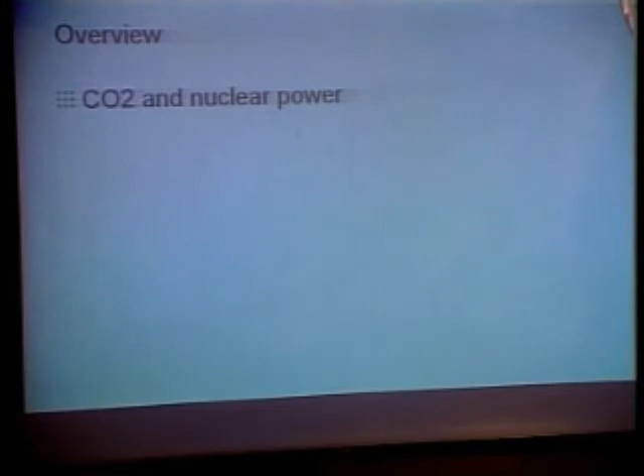Okay, so first of all, I'm going to look very briefly at some of the UK's carbon dioxide emissions and the role that nuclear power potentially has in reducing those emissions as a result of the need to reduce emissions because of climate change. That's the key argument the nuclear industry puts forward to support building new stations in this country.

Then I'm going to look in slightly more detail at what our electricity system looks like at the moment, not just generating stations, but also the broader infrastructure.

And then you'll notice I'm talking about future energy options, not just future electricity options. What I'd like to see is a situation where we begin to think about how we use energy across the board - transport, heat provision, and electricity - and not separate them artificially, as we do at the moment.

And then, to sum up, I want to think about some of the implications of building new nuclear power stations and what impacts that might have on one possible future configuration of the energy system in the UK.

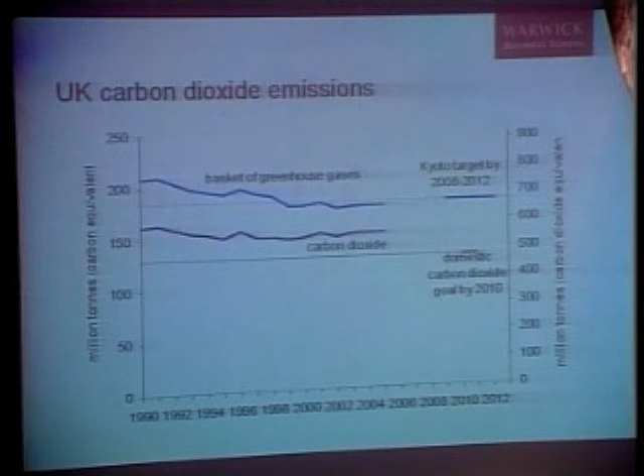Okay, so this is looking at the UK's carbon dioxide emissions. As you can see, the top line, the blue line, is our greenhouse gas emissions since 1990. Under Kyoto, we've got a target of reducing those emissions by 12.5% against our 1990 levels by 2008 to 2012. It's not hugely clear, but the light blue line is in fact below the dotted light blue line, which is the Kyoto target level.

So in other words, we're pretty much going to meet our obligations under Kyoto to reduce our carbon dioxide emissions. If you look at the lower line, that's our carbon dioxide emissions. The government set itself, when it came into power, an additional challenging target of reducing carbon dioxide emissions by 20% against its 1990 levels by 2010. And when it came into power, it was pretty much on target for doing that.

You can see there was a blip in 1996 when carbon dioxide emissions rose, but effectively they'd been on a relatively steep downward incline since 1990. However, over the last couple of years, they've actually started to go up. They leveled off and then started to go up. There's certainly no further decline in the emissions of carbon dioxide.

And what that means is that the government set itself a target in 1997. It claims it's taking climate change very seriously, that it wants to do everything it can to head off the threats of climate change. But actually, when it comes to the UK's own performance, it's performing pretty badly - the government has done almost nothing since 1997 to reduce our carbon dioxide emissions lower from their 1990 levels.

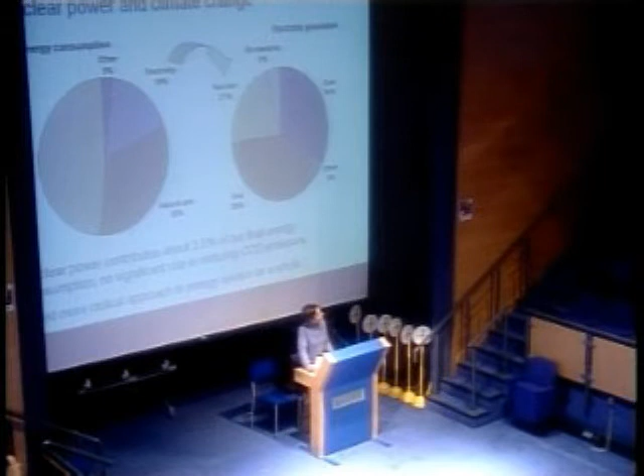But if you're talking about reducing carbon dioxide emissions on the scale that is needed and the government is committed to doing, what you need to do is think about the energy system as a whole, not just electricity. Electricity is 18%. You need to think about all of this, because that's where the majority of carbon dioxide emission reductions are going to come from.

So when I talk about energy systems and electricity systems, I just thought it would be helpful if I explained a bit more about what I was talking about.

That's a term that gets bandied about, so I thought it'd be useful if I explained what centralized means. It means there are very few, very large generating stations dotted about on the system. They tend to be very large coal or very large nuclear power stations, all sited pretty much away from the areas where the power is actually used.

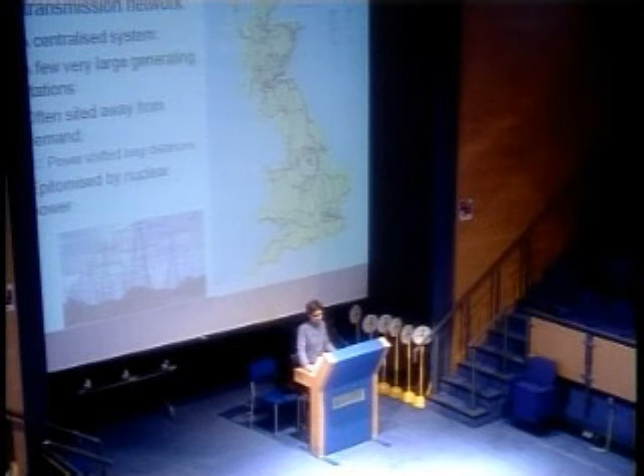At a lower level, what you get is the distribution network. So you have those very large pylon-type things shifting bulk power to and fro across the country, and then once you get down to where people actually use power, that's called the distribution network - those are the poles rather than the pylons, if you want to think about it that way.

One of the key characteristics in a centralized electricity system of the distribution networks is that there are no power stations really sited on these distribution networks. You've got all the lines and people connected to them because they want their power, but there are no power stations connected because they're all connected to the transmission network.

What distribution networks are designed to do is take the power from the transmission network and ship it one way down the wires to where it's used - in other words, to your house, or to the factory, or to your office. Power just flows in that direction. They're operated passively; they're designed specifically only to operate in that one-way system. They're not designed to ping power backwards and forwards and act as some sort of balancer - they're just designed to ship power that one way.

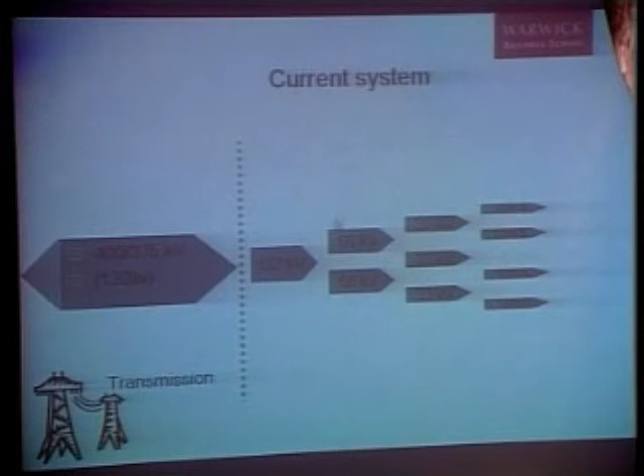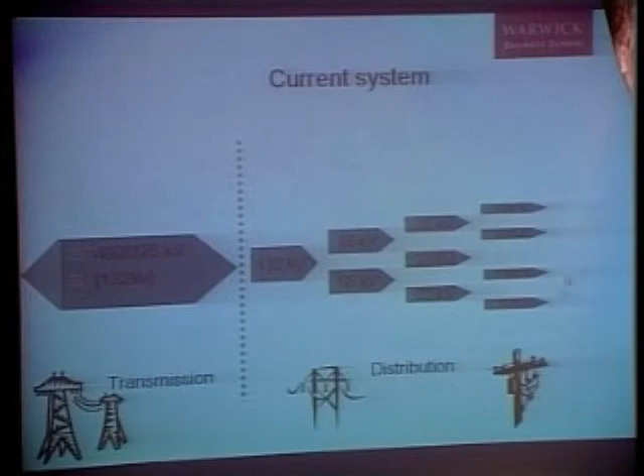Lower down the scale, as you can see, the lines get narrower. That's the distribution network, and that goes through decreasing voltages until you end up here, which is where the power is taken off, or most of the power is taken off.

At the moment, a lot of the power stations, whether fossil fuel or nuclear, basically inject their power straight into the transmission network. Large users, people who use large quantities of power, very big factories, can take their power at very high voltage straight off that transmission network.

Smaller factories take their power off the distribution network, as do office blocks, developments, large local authority projects, whatever. They get slightly lower voltage, but they're still taking it off the distribution network. Finally, right at the end of the chain, you've got houses, or very small offices, relatively small users.

In terms of how the power flows on this network, you've got two-way power flows on the transmission networks, and one-way power flows on the distribution networks. In other words, they just take power from the transmission network and ship it to the end user. That's it, that's all they do - they're just there to cart power about in one direction. That's a system we've had in the UK for 50 years.

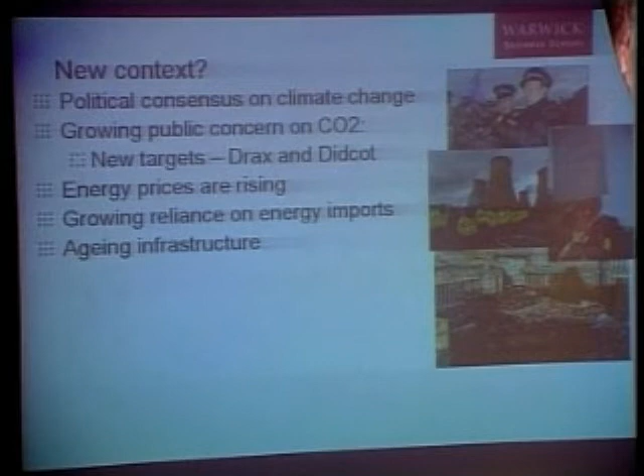Also, the infrastructure is getting pretty old. The pylons and distribution line poles were designed for a lifetime of 40 to 50 years, and most of them are now reaching the end of that lifetime. They're going to have to be renewed, and that's something that's going to cost billions of pounds, spent over the next 10 to 15 years. So we need to start spending money on our energy infrastructure. If we don't, the lights are going to start going out. But more importantly, spending that money to renew our infrastructure also gives us an opportunity to change it rather than just replace it.

Then there are broader security concerns about terrorism and the possibility of attack - not just on nuclear power stations, where there's been a high profile debate about security issues, but also on other stations and other parts of the infrastructure. There are scenarios people have put forward, for example, of people bombing transmission networks and effectively cascading power failures down the system, because it's so centralized and everything relies on the transmission networks to ship power around the country. That's a very real concern.

So what you've got there is a set of environmental and security drivers for the energy policy debate, which are effectively new and haven't really been high profile so far. But what it does mean is that there's a possibility at the moment to challenge the current model of the UK's electricity system, and to think again about how we configure it, what we use to generate our power, and what the system looks like.

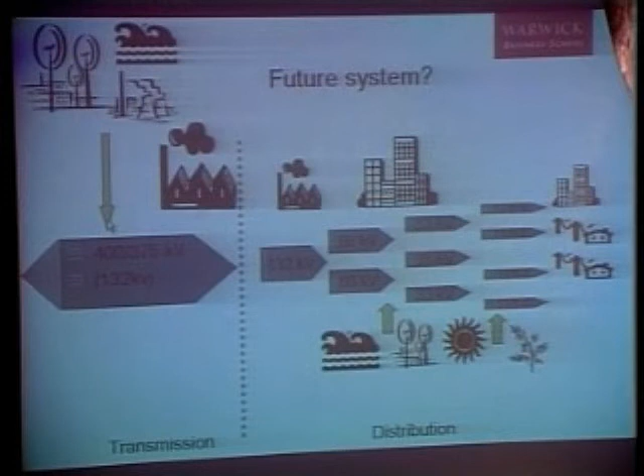Instead, you would have power based on the distribution lines, and that would be largely renewable power - wave, wind, solar power, either solar thermal or PV, and also biomass power. That would be injected into what have previously been passive distribution lines, making them an active participant in the electricity system. In addition, there are a whole pile of new technologies coming forward to store energy - basically batteries, not nuclear waste barrels, which I realize they looked like earlier.

Part of the problem with renewables, which renewable skeptics highlight, is that a lot of it generates intermittently - in other words, it's not constant. You don't get power out of your windmill if there's no wind blowing. But what you can do, and what's increasingly looking economically viable, is to store that power - effectively like recharging a battery. When there's an excess of wind, you store it in your battery; when the wind's not blowing or there's high demand, you pump that power back into the grid. That would be a way of counteracting this problem of intermittency with renewables.

In addition, you could have combined heat and power plants - plants that generate both electricity and heat, and the heat's used by small factories or large offices. They'd have a little power plant in their basement generating electricity, plus using the heat, or using the heat to power things like fridges, because that's a whole other dimension, using combined heat and power plants to actually produce air conditioning. Don't ask me how that works, it's beyond me. But in addition to taking power off the grid, they'd also be in a position to inject power into the grid.

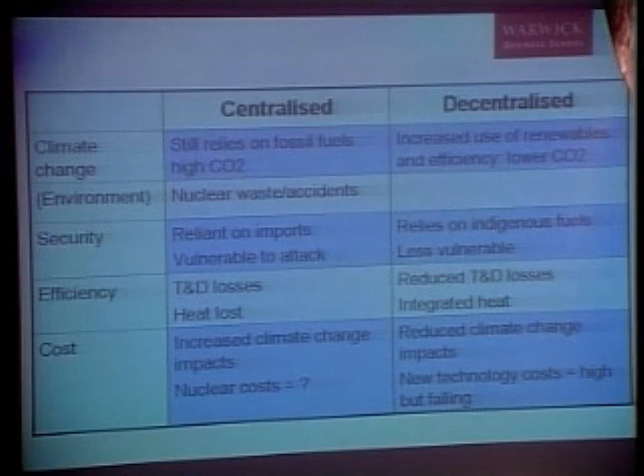They haven't shown the problems of ever increasing costs that the nuclear industry has. So I think if you're taking a bet, I would go for the smaller scale, more novel technologies at the moment than I would put my reliance in nuclear power being a cheap future generating option.

And then there's other issues which may or may not be interesting. One is that in a centralized model, all the power stations are sited way away from where you live. You don't see nuclear power stations. Unless you live next door to them, you don't know where your power comes from. In a decentralized model, you would know pretty much where your power came from. It may come from your own roof, who knows?

But that gives you, not just yourself, you become part of this system, and because you're part of it, you've got a greater degree of control over it, and that level of responsibility should in itself lead to greater awareness and lower carbon dioxide emissions on an individual level.

Okay, so when I started off, I said that the government's thinking about building new nuclear power stations, and I wanted to think about what some of the implications of that decision would be in terms of the future configuration of the energy system, not just the electricity system. And I think one of the things, my starting point, in a sense, is that the two things are effectively incompatible.

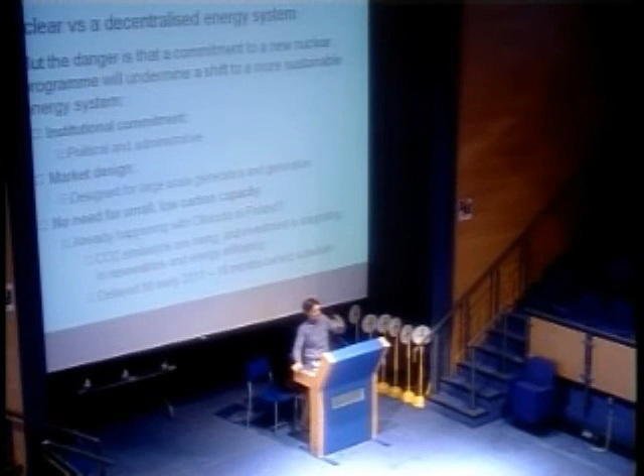So what they're basically saying is, we don't have to do anything to reduce our emissions till 2008, because that's when the power station will come online and our emissions will drop automatically, so we don't have to worry about it. In the interim, their emissions are going up. And because there's a great big lump of power coming online, people aren't putting money into renewables and energy efficiency because they're scared there won't be any need for the power, they won't be able to sell it.

And the other issue with Olkiluoto, which is inherent in any nuclear project, is that it's already delayed. They've been building this station for about 18 months, and it's already 18 months behind schedule - in other words, they might as well not have bothered starting. They've got huge technical problems with this, but they're also pouring in huge amounts of resources, and people are getting very complacent in the interim about their carbon dioxide emissions.

So does all this matter? What I'm basically saying is, if you're going to build new nuclear power stations, you're not really going to be able to have a decentralized energy system. It's just not going to be worth it. You're not going to have lots of renewables. You've got to make a decision between one and the other.

In policy terms, regardless of my own personal view, there is a key issue politicians need to think about in terms of carbon dioxide, and what the nightmare scenario is: they decide to commit to a nuclear power program, they say we're going to build 5 stations or whatever. In the interim, as is happening in Finland, you stall investment in renewables, in CHP, and nobody bothers trying to reduce their demand because they think, well, we're going to get loads of carbon-free electricity in the future.

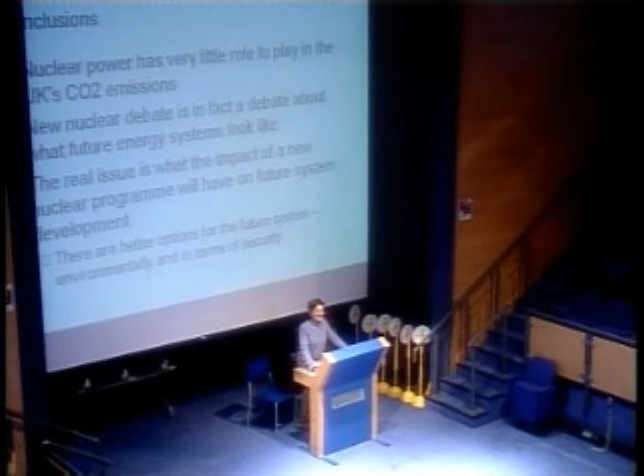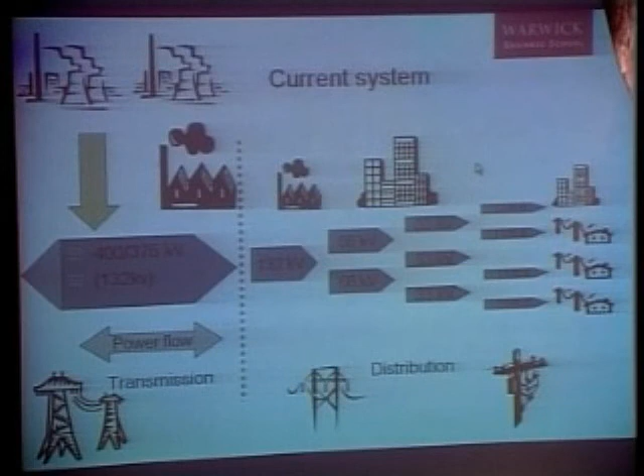Could you bring up the original pie chart? So we've got the pie chart, yeah. I'm not arguing for this particularly, but you were saying that you can only do that sort of 18% because that's the electricity that's generated, but can potentially houses be heated using electricity, and potentially electric cars as well, which means it could have a much bigger chunk of the amount of power. No, that's true. That's true.

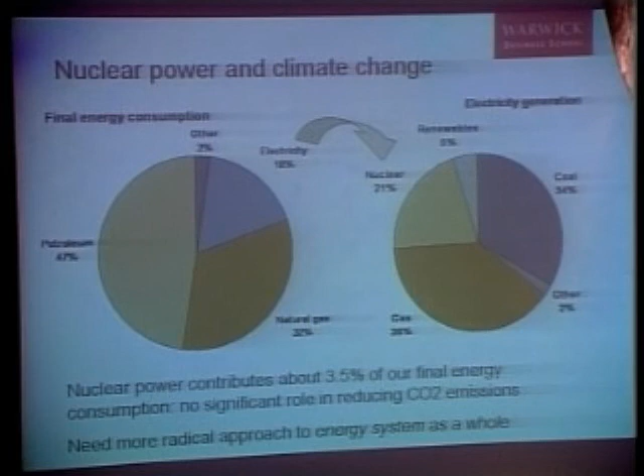I think in order to get a lot of that—if you're talking about expanding the electricity sector to have an electricity sector that's much more based on nuclear—then you're looking at a huge program of nuclear reactors in order to be able to address electric heating and electric cars. So you're looking at something like the French program, where they've got 75% nuclear electricity generation, and quite a lot of that is directed towards house heating and things. I don't think anybody's particularly talking about having a nuclear program on that sort of scale. I think the UK pretty much would rule that out.

The other thing is, I think you'd find it quite difficult to operate an electricity system in this country based on a very high proportion of nuclear power. One thing I didn't talk about: nuclear power stations can only operate at full output, if you like—they're all or nothing, either full output or shut down. Whereas if you think about how demand works during the day, first thing in the morning there's very high demand, at 5 a.m. there's no demand at all. So demand goes up and down like that, and if you've got a lot of nuclear power, it can't cope with the fact that demand's going up and down and spiking like that.

The reason the French can do it is because at night, firstly, they've got very high degrees of electricity heating, but also they export their power very cheaply at night to the rest of Europe. Whereas the UK, because it's an island, isn't hugely interconnected with the rest of Europe in terms of the electricity system, so it would really suffer. It would find it very difficult to cope with that sort of high level of nuclear output plus demand going up and down. So technically speaking, they'd find operating a system with that level of nuclear output very difficult.

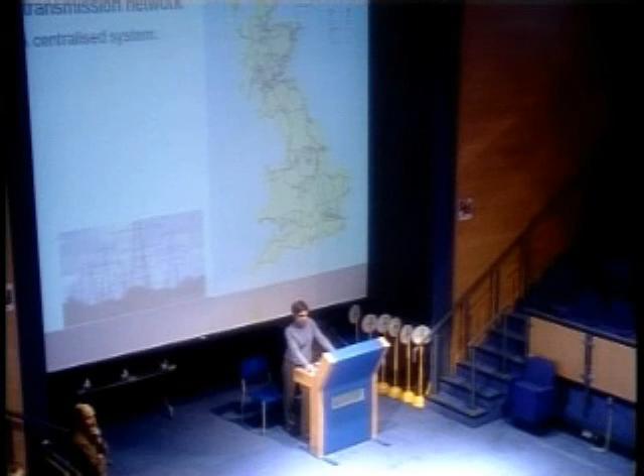That just leads you to a maximum percentage level of nuclear generation on the system. But the question I really wanted to get to - in your model, I do agree the trends are going in that direction, but we still have to first go for energy efficiency and energy savings as much as we possibly can, that's always at the top of my list. But then we've got to balance, apart from things like pumped storage and big battery devices, generation with demand. And if we don't get a significant net reduction in gross demand, the generation will be met from somewhere.

What is your view of the percentage you could probably meet by renewables, even in a distributed system, while maintaining security? I think that's an interesting question. I think you could, in theory, have a system entirely based on renewables, but it depends on the mixture you have. You could have some wind and some wave, but as you've said, they're intermittent and subject to weather patterns. Tidal isn't - it's intermittent but very predictable, so you can compensate. The more different technologies you've got, the less impact the intermittency has. If you have a high degree of biomass, potential for demand reduction - not just energy efficiency but people voluntarily going offline - and a high degree of storage, then you could, in theory, have a system that's entirely based on renewables.

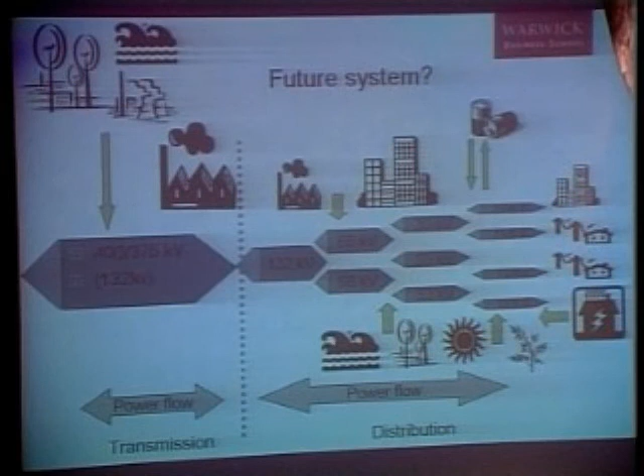That's a huge mistake we made over the last 20 years. So over the last 15 years, we built a lot of new gas stations in this country which only generate electricity. All the heat is lost. Actually, we should have built them to produce heat as well, and we wouldn't be nearly so worried now about what our carbon dioxide emissions are.

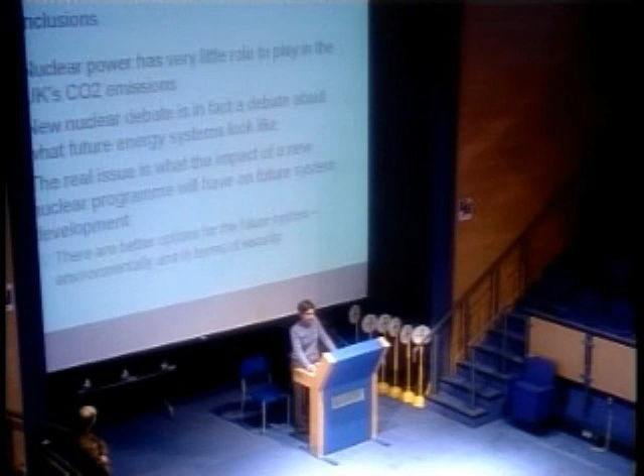You mentioned Finland making a bit of a mess of it. Is there a country that you would point to that's doing the opposite? Well, I'm glad you asked me that, as I didn't know how long this talk was going to take, and I didn't know quite how detailed the audience wanted me to go into it.

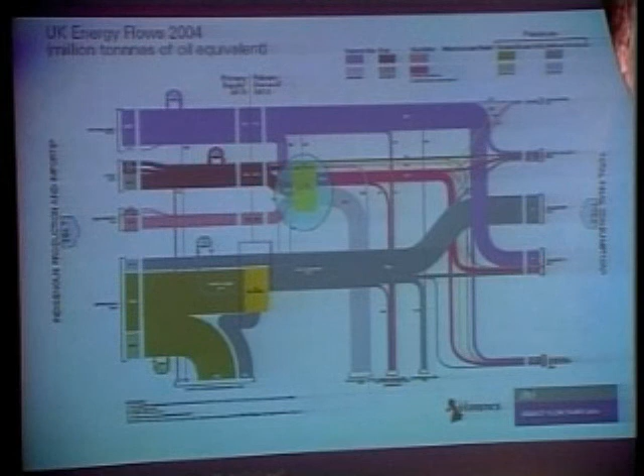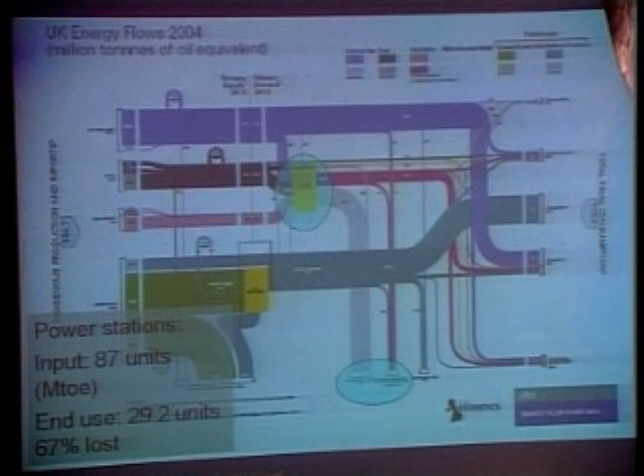So those are power stations, those are your losses. You input into this system 87 units, million tons of oil equivalent in this case. Power stations to final end use is 29 units. In other words, 67% of our power, one way or the other, is lost - 67% of our energy through this sort of power station system that we have at the moment.

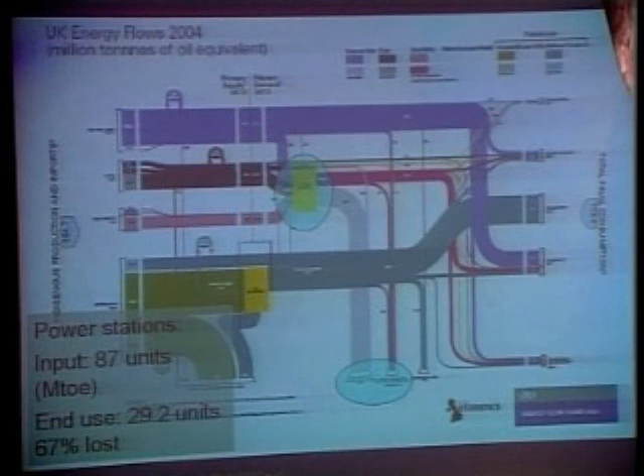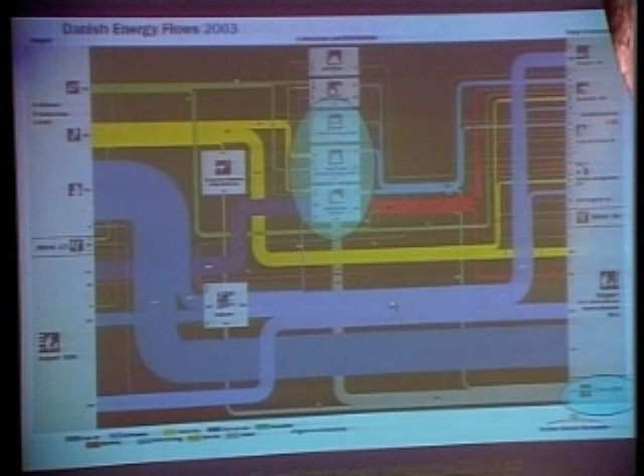This brings me to your question, which is - this is the Danish system. Same deal. These are the power stations, they do it slightly differently, but these are the power stations here, and these are the losses there. In this system, in the Danish system, you get 415 units put in. They use a different unit of measurement, the petajoule. Your output is around 200, your end use is around 278 units.

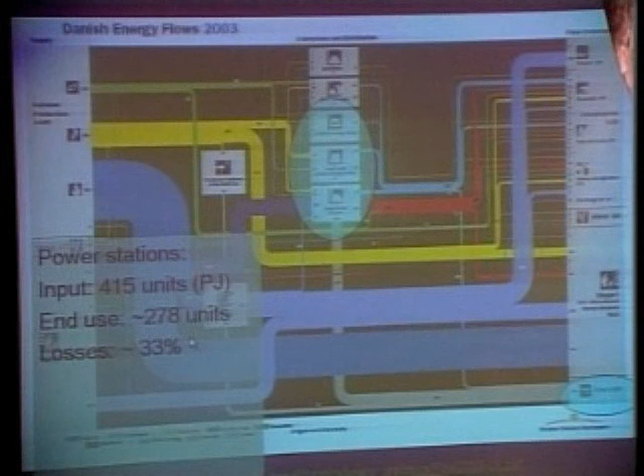So in other words, you have losses of 33%, half of what you get in the UK in terms of efficiency - twice as efficient. And the reason they're twice as efficient is, firstly, they've got a lot of CHP, combined heat and power stations, which are small stations located down the bottom of your road. They're not miles away, so you get less losses, you're more efficient, you get lower carbon dioxide emissions.

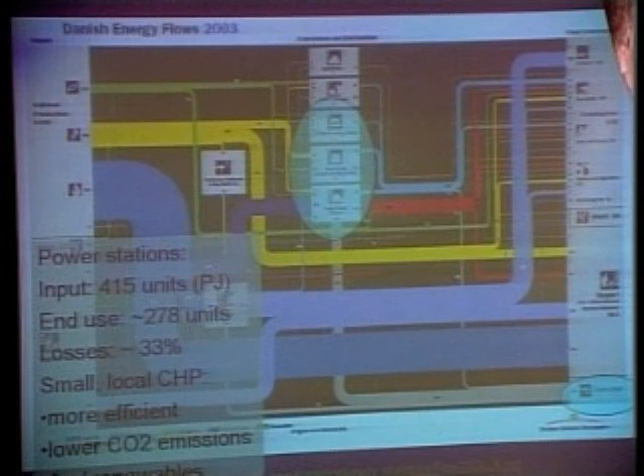Another issue that is particularly significant with the Danish system, although not so much in this context, is that they also have very high levels of use of wind. They have about 20% of wind on their system, compared with about 2% in the UK. So yes, there are countries that are doing it better than us, one of which is Denmark.

What's the input power of that - are they gas or? Some of it's gas, some of it's biomass, so some of it's plant material. It's a mixture, and I think also some of the older ones are coal. The other thing about the Danish system, it's not ideal - there's quite a high degree of coal use in the system, but they use it more efficiently. They don't waste it so much. So yeah, it's gas, coal, or biomass.